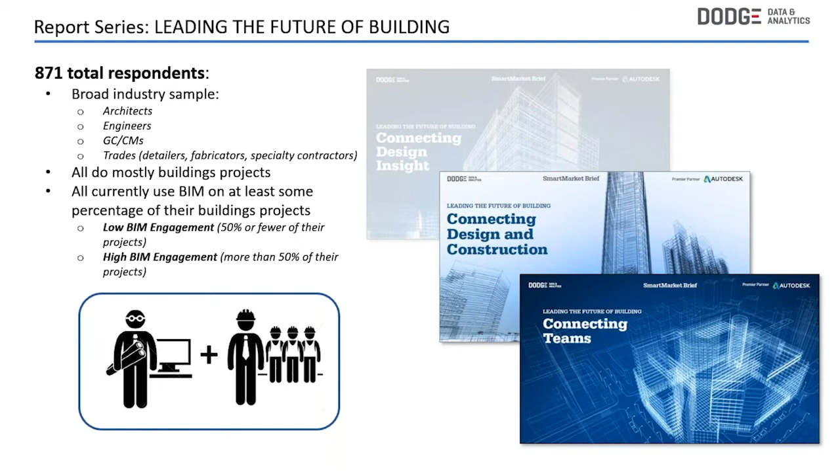And you'll see, I refer several times, and you'll see if you download these reports, we break out a lot between those that we call low BIM engagement, those are in the shallow end of the BIM pool. They're doing half of their projects with BIM or fewer, versus high engagement, who are doing more than half their projects with BIM now. And you'll see some really interesting differences that flow out of that. So for today, we're not going to focus on the generative and computational design part. We're just going to focus on connecting design and construction, and then I'll show you a bit about the connected teams findings that we had.

So looking at this report, the Connecting Design and Construction, as Annalisa referenced it, for this we wanted to focus a lot on MEP and structural, and how the engineers and the trades and the architects and the GCs all collaborate more effectively by becoming more connected with what they're doing in BIM. So we start with their overall perspectives on BIM, then we get more specifically into engineers and trades, then this thing we call the integrated BIM workflow, which I'll show you the definition that we use, and then some of the findings around that, and then some of the things in this report that give examples by industry leaders.

So let me take you quickly through this, but please, take advantage of these. They're free.

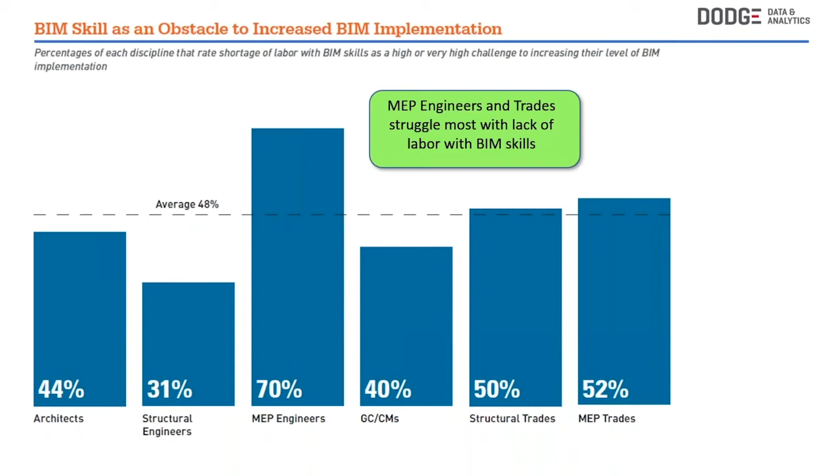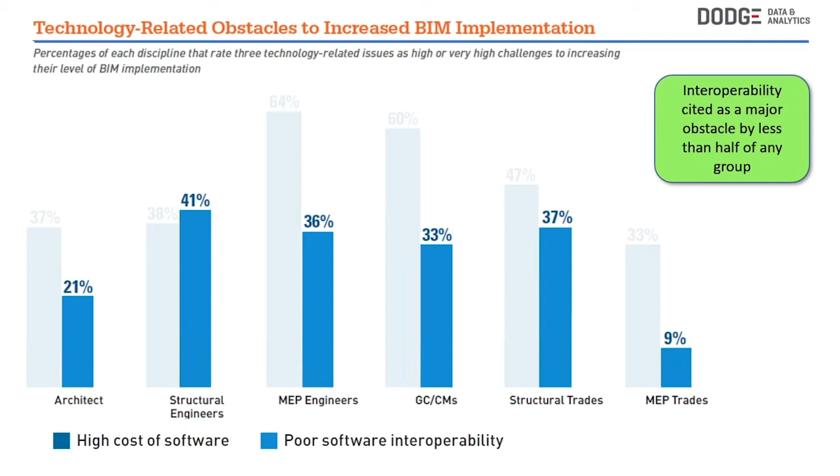We looked at technology-related obstacles. We looked at 3 different ones. First, you'll see here what people say about the high cost of software. That's where the MEP engineers are really saying that they're in the most pain, with the GCs after that. Interoperability, nobody was really more than 50% on that, right? So that doesn't seem to be overall a major pain point. Hardware upgrades, those were tougher, especially here where you'll see the MEP engineers were really complaining about those hardware upgrades.

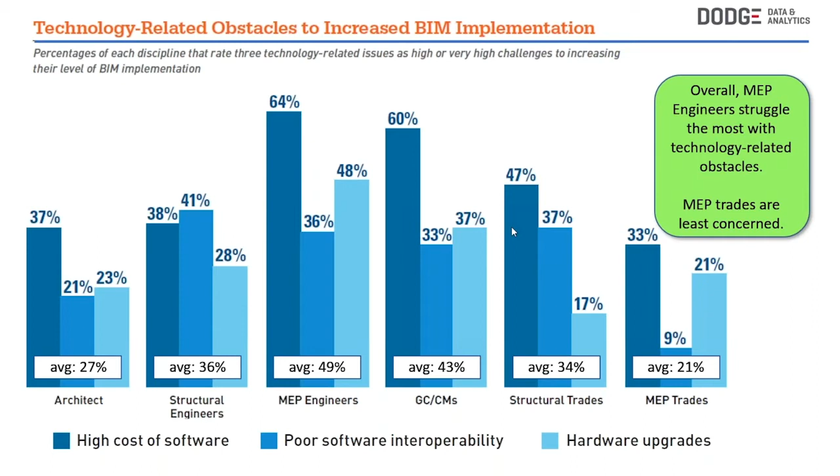Then we took them all and averaged them, right? Architects, structural engineers, et cetera. You can see overall, it's those MEP engineers that are struggling the most with technology-related obstacles. And interestingly, the MEP trades are absolutely the least concerned. They're the ones that are kind of most on board and least troubled by any of these obstacles.

So then we asked them to look 5 years in the future. All right, you're using BIM today, you know what kinds of benefits it's providing you. Where do you think it's going? All right, where do you see this developing for you? How's it going to be impacting you in the future? And we gave them these 6 alternatives here.

Tools that allow visual and creative insight to produce better design alternatives faster. Intelligent models that lead to more consistent and coordinated contract deliverables. BIM-based processes producing better coordinated shop deliverables. Single source of truth, right, in that model. The integration of analysis and code-based design with 3D models, and the ability to visually simulate project delivery timelines for estimation coordination.

So you see here among the design professionals, overall, in general, the architects are the most enthusiastic about all these things being really powerful benefits in the future. Among the contractors, the MEP trades were the most enthusiastic among all these construction disciplines. And you can see they're color-coded here, for sort of the intensity of the number that are responding to these, seeing that they believe these will be really important for them over the next 5 years.

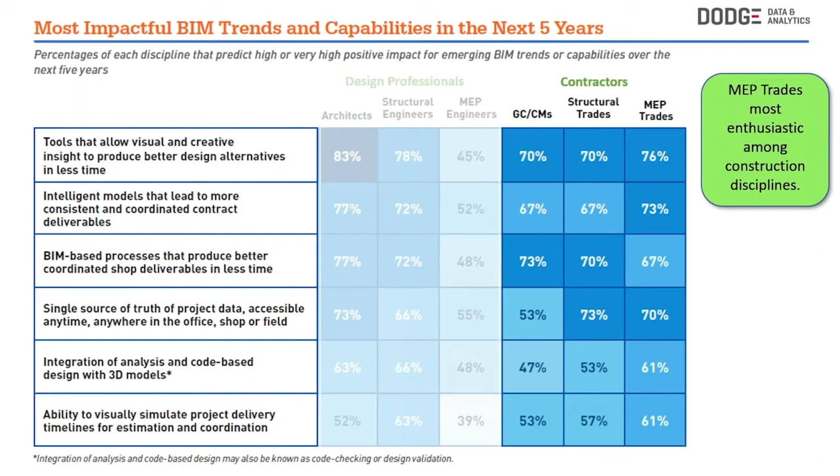As you take it and just average all of those together, again, it's a good way to kind of look at who's leading and who's lagging. And again, the MEP engineers are struggling now and not that enthusiastic about the future. So this is not trying to point a finger at these folks as much as to say we need to help them. Okay, it's clear that we need to help them advance and feel more comfortable and get more engaged.

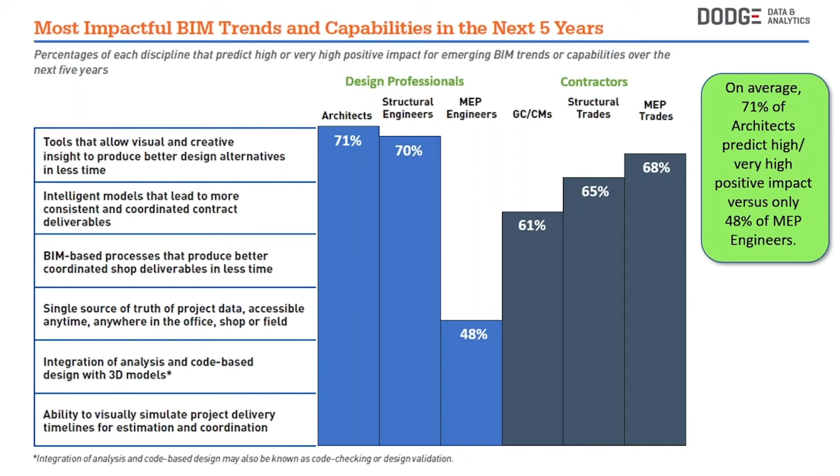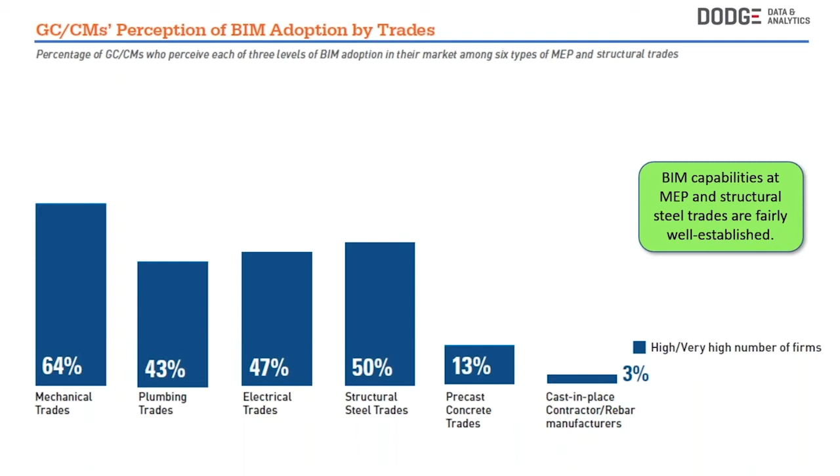So we asked GCs the same thing about trades, okay? In the markets you work, can you go and find trades who will come with BIM skills, right? Mechanical trades, right up there, right? Almost 2/3 are saying, I got no problem finding that. The other ones are okay, but you want to see stronger numbers here, right? And as you can see, the concrete is where we're really struggling, right? And again, I'm not trying to point a finger at them. I'm trying to say, look, we need to help the concrete trades to engage and adopt BIM and become able to work with everybody else.

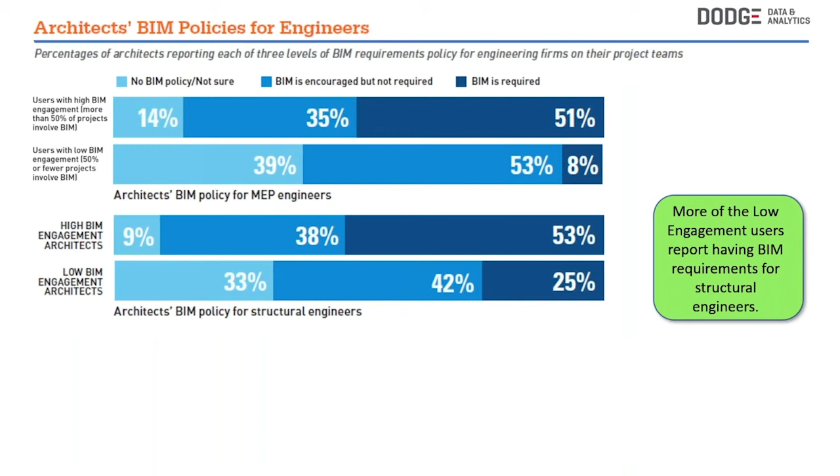Civil engineers, we're in our infancy on this, guys. We really need to find ways to engage civil engineers more effectively in this because they play an important role in buildings and then especially in civil work.

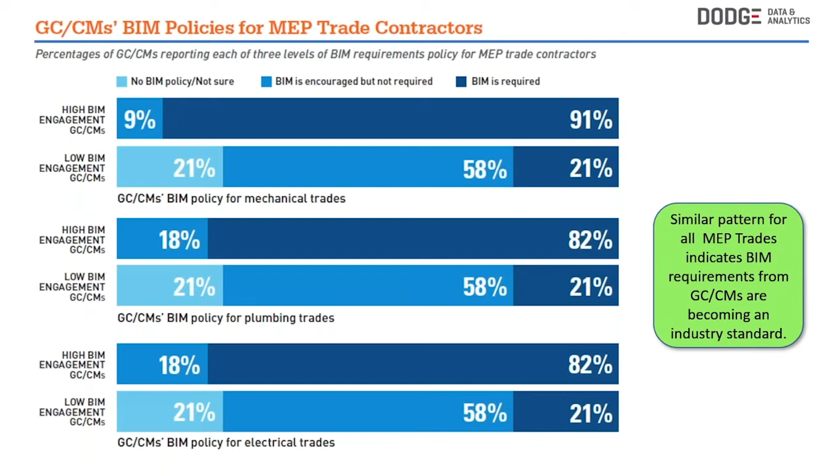So we said, well, okay, so here's how you see the availability. What are you doing about it? Are you putting policies in place with GCs for MEP trade contractors, okay? You're seeing really great numbers here with GCs and plumbing trades and electrical trades. A lot of folks really requiring it who are in the deep end. Really dramatic drop-off, though, for those in the shallow end. All right, so, I mean, going from 21 to 91, really, really big drop-off. So the more experience that these GCs have, they really know for absolutely sure we have got to make sure that we're bringing on trade contractors who can work in this BIM environment.

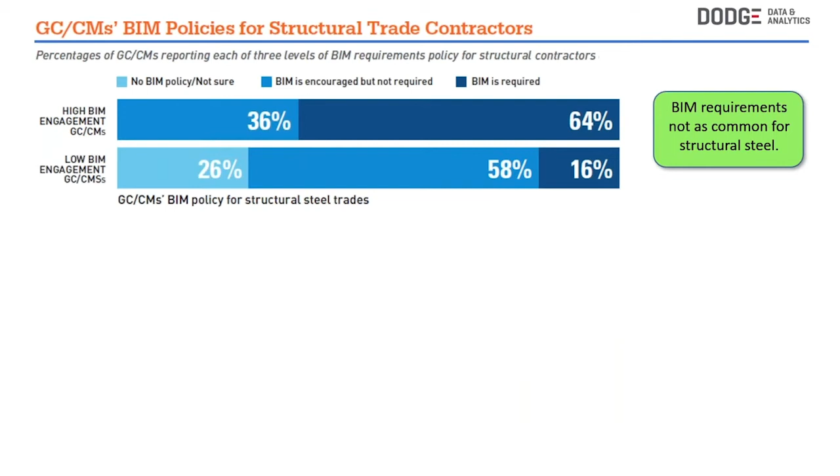So the percentages of the GCs that report each of the 3 levels of requirements here for structural, you'll see with the steel, it's pretty good, but it really falls off with concrete. So again, as an industry, we've got to focus on this. We've really got to find a way to bring the concrete players in with us because they're such an important aspect of all of our projects.

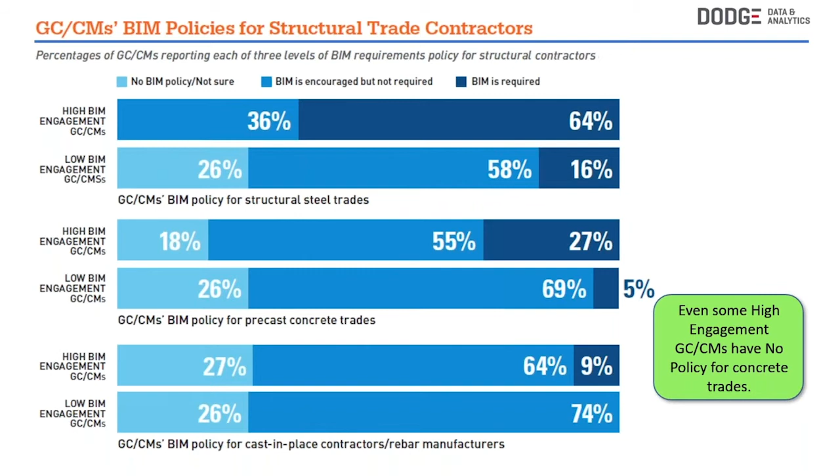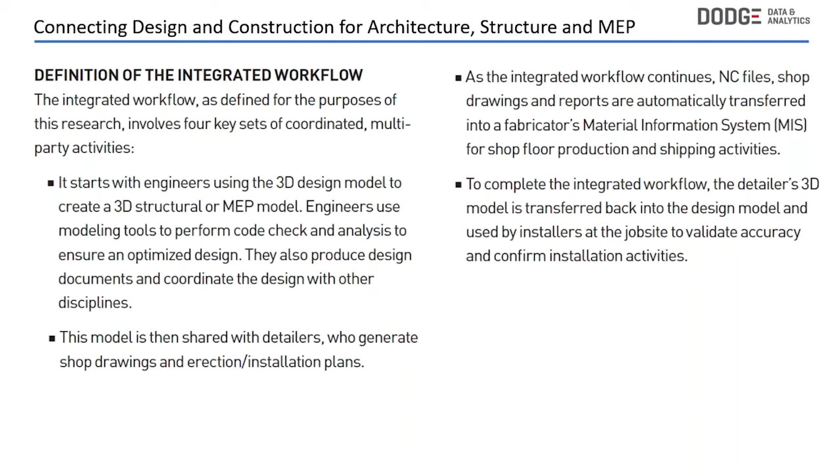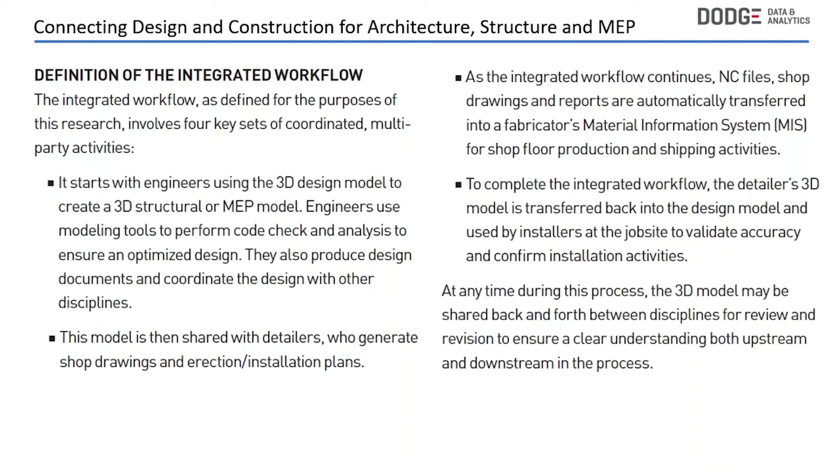And then to complete that, those detailers' 3D models come back into design to say this is what actually got built, validating the accuracy and confirming the installation, right? That's what we call the fully integrated workflow, those 4 stages. So at any time in that process, the model is getting shared back and forth and iterated upon. We wanted to know about the frequency, the benefits, and where people think it's going in the future.

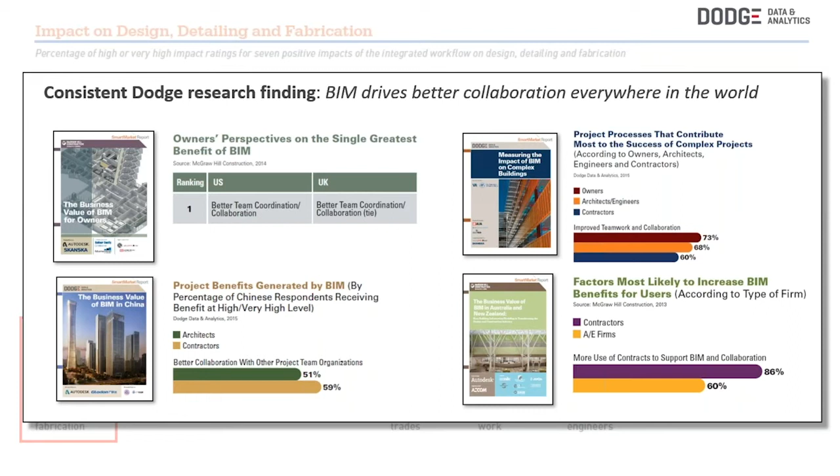I really love that one. It fits with so many other things that we find in all of our reports, is that better collaboration and better communication is happening everywhere in the world. It's just a wonderful aspect of modeling.

So when we break it down by, you know, who said what are the top benefits of this integrated workflow by company type, among the design professionals here, among the engineers, the better communication came out first for everybody. And again, this is in the report. I don't need to spend a lot of time on it here. You can look at it more carefully because we also have it among the three kinds of contractors. You know, what's actually most important to each one of the players. It's important to know where their benefits are.

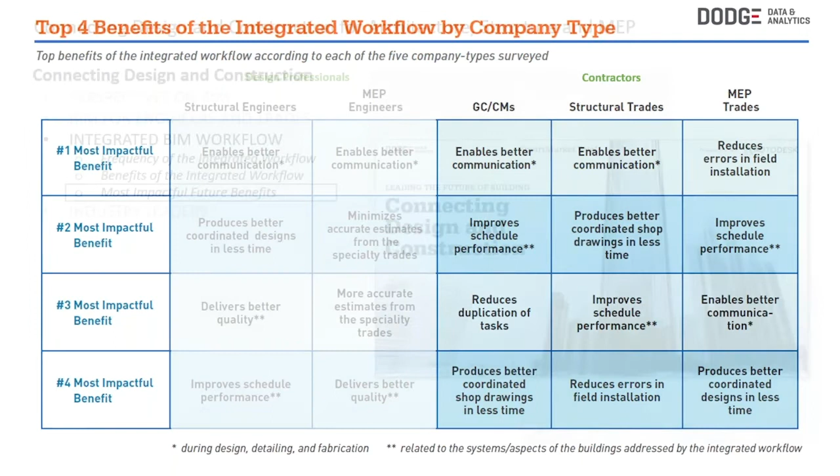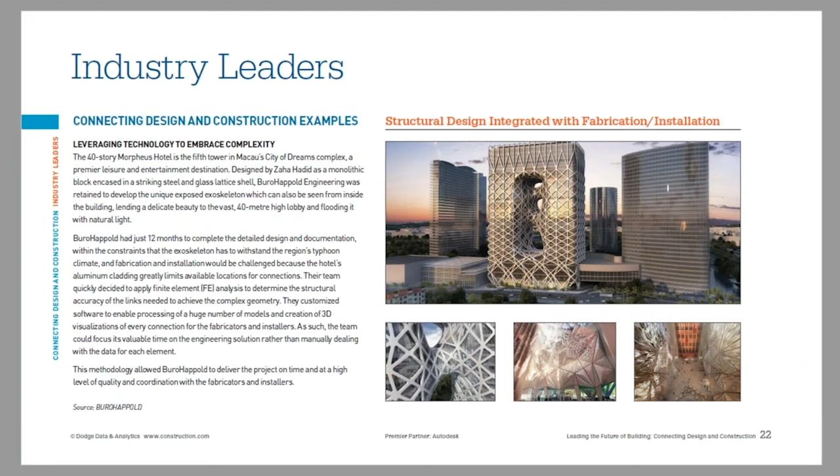So in this report, I won't spend much time on it today, but you'll see we've got some really interesting case studies of what people are doing who are engaging in this integrated workflow. We've got structural integration with fabrication on really complex projects like this one. We've got BIM to fabrication workflow and MEP. We've got design and construction team coordination.

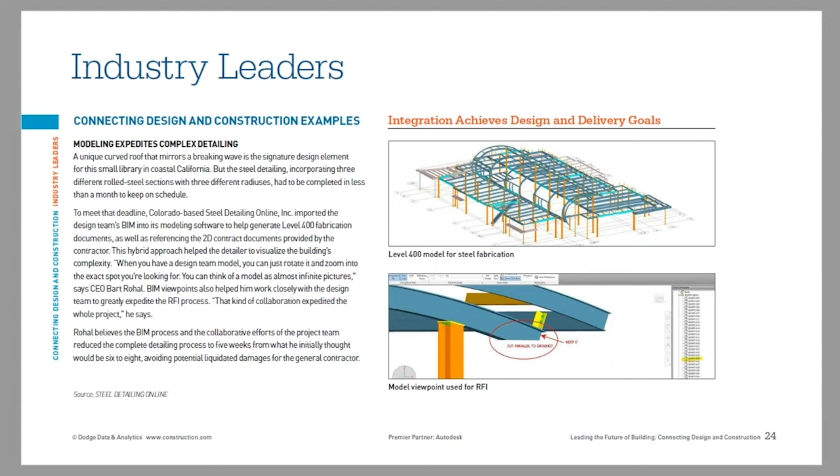We've got integration that's working around structural, specifically in steel in this case, with really complex design, right, that was difficult to figure out. You can imagine what this would have been in drawings, right? So much more successful to get the whole team working together to make this work out with BIM.

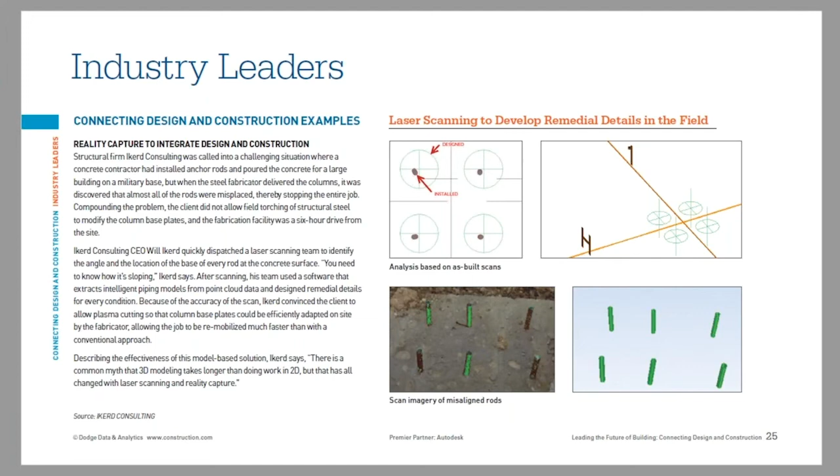And then, field work. All the crazy problems you run into, right? Misaligned rods and stuff. How do you deal with that? You run a laser scan, you come up with solutions, you share them with everybody. I mean, it's just so much more effective and quick to get this stuff done right to fix field-based problems. So good stuff to dig into here as inspirational examples.

So let's spend a few minutes looking at the other report that's part of this three-part series, because without connecting the teams, I mean, you really have some difficulty making any of this stuff work. Again, you're trying to break down these silos of excellence which have been built and connect them with each other so that everybody experiences better performance in all kinds of their workflows.

So we looked at the benefits of the project collaboration solutions that people are using. Are project teams equipping owners with it, right, so that everybody can take advantage of it and the owner will drive it. And then how many people are actually working on project delivery formats that are collaborative. So in terms of the benefits here, we broke this down with three different types, and I'm about to ask you your next poll question, so it's important to plug into this a little bit.

Whether somebody is using what's known as an FTP site, and those have been around for a number of years, a lot of contractors put them in place. It's really a centralized server that's typically controlled by a project team member. It's most often the GC, with very project-specific permissions, allowing upload and download. It's kind of single point stuff.

Second was these more generic cloud solutions like Dropbox or Box. They're not AEC specific, right, but they're cloud hosted as opposed to being on somebody's centralized server. And they're for file sharing, viewing, markup. Those are way more collaborative.